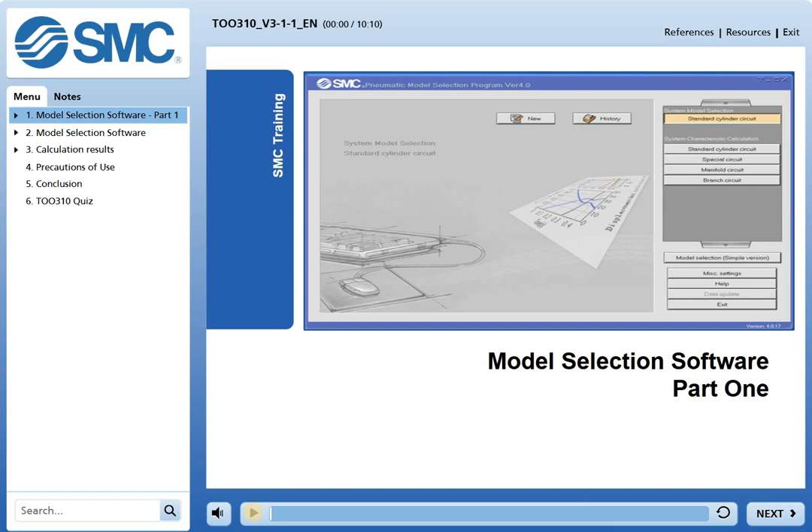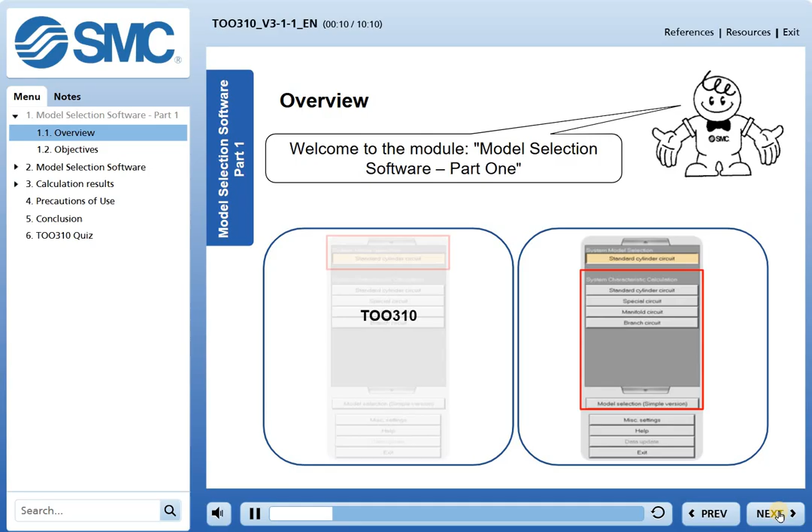Model Selection Software, Part 1. Welcome to the module Model Selection Software, Part 1. There are two parts to the Model Selection Software series, modules TOO310 and TOO311. This module will focus on the system model selection function.

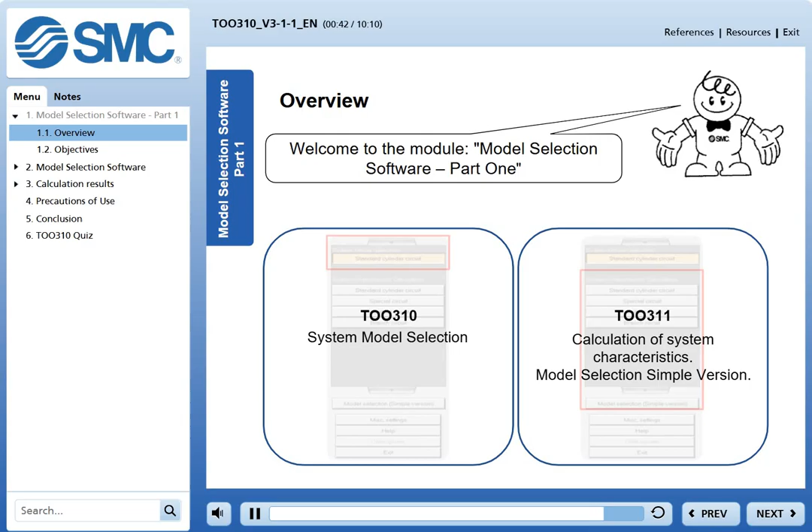You would use this function when you know an application's operating conditions, and would like recommendations on which SMC equipment is suitable for the job. The second module in the series, TOO311, will cover the calculation of system characteristics function. You would use this function if you already have particular SMC equipment in mind, and wish to know if your choice is suitable for the application. The second module in the series will also cover how to use the simple version of the model selection.

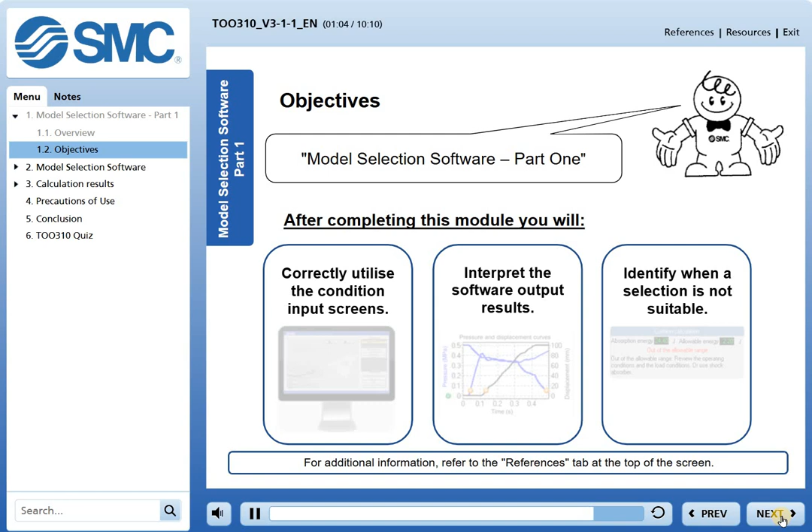After completing this module, you will be able to correctly utilize the condition input screens, interpret the software output results, and identify when a selection is not suitable. Please note, it is assumed that users of this software have a working knowledge of engineering principles, and the software should be used as a guide only.

Where can I download the latest version of the model selection software? By connecting to the site address http://www.smcworld.com/select/en/air. Click on How to install to find out about the installation procedure. Please install the software on your PC to complete the exercises.

This is what you can see on the home page. On the right-hand side, you have the different topics offered by the software. System model selection, system characteristics calculation. A simple version of model selection is offered. The miscellaneous settings button allows you to choose the language, program units and display the version of the software you are working with. The help button takes you to the help manual.

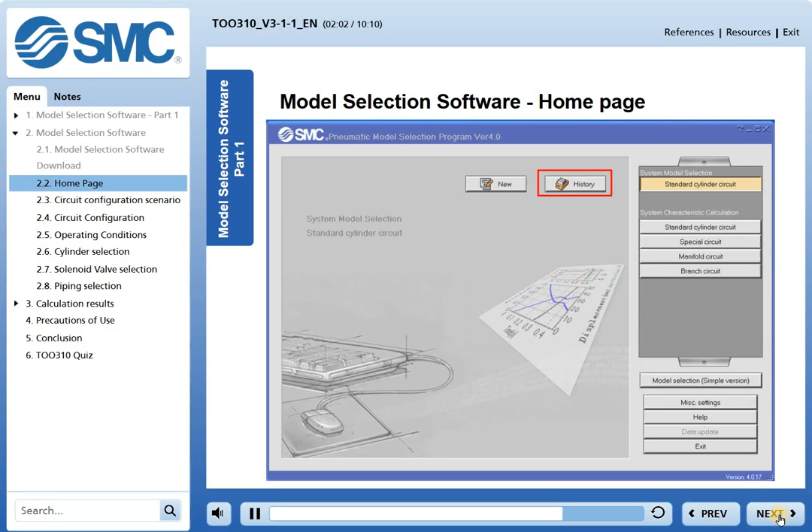The exit button lets you close the software. Pressing the history button displays any saved results from previous calculations. To run a new selection or a new calculation, press the corresponding button from the list and then click New.

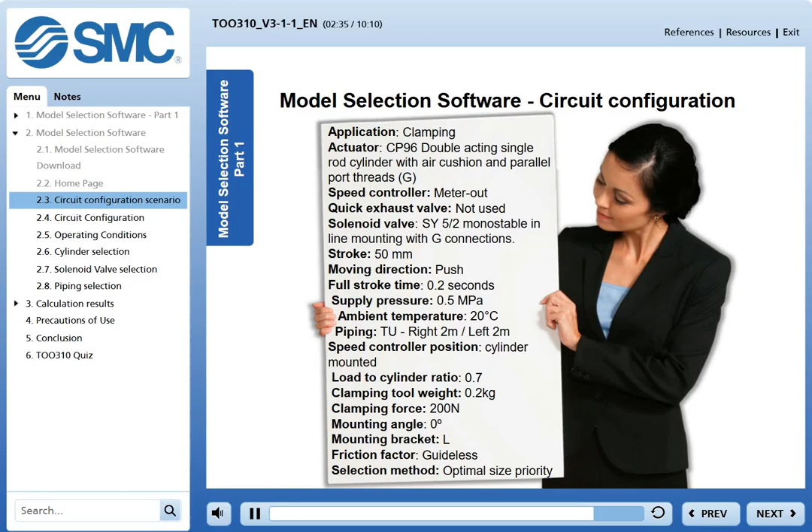In our example, our customer wants to clamp a part so that it can be machined. Using the operating conditions provided, they would like recommendations on which SMC equipment is suitable for the job. If you want, you can download and save a copy of this example from the Resources tab at the top of the page. This will make it easier to practice the example on your own PC before you complete the quiz. Firstly though, let us show you a few videos demonstrating how the software works.

The cylinder circuit. Select the standard cylinder circuit button and click New. On this screen, the operating circuit can be configured by selecting a type of actuator, the solenoid valve, and the control equipment. Once the type of actuator, the control equipment, such as flow controllers and quick exhaust valves, and the solenoid valve have been selected on the right-hand side, the configured circuit automatically appears on the left-hand side.

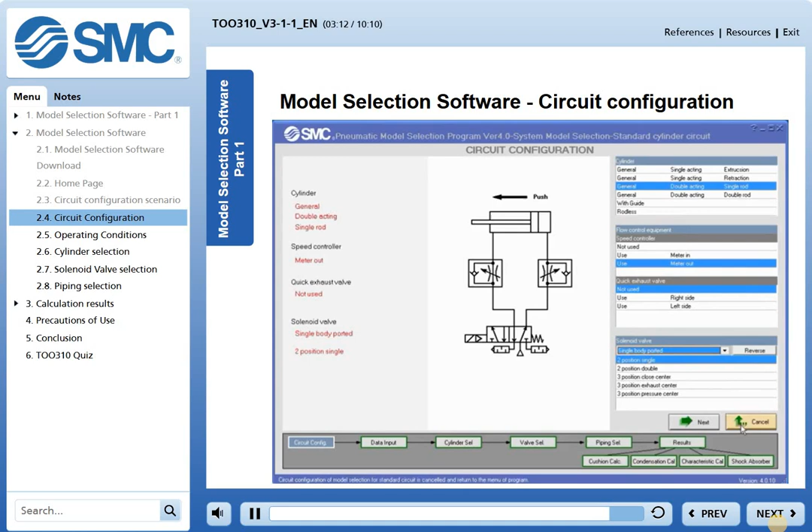In the solenoid valve section, a drop-down menu allows you to choose the valve mounting. The cancel button returns to the main menu. The next button moves on to the condition entering screen. This screen is used to enter the selection criteria. The circuit selected during circuit configuration appears on the left-hand side. We will enter the application parameters, as per our example.

You can see that in most cases, you can use the drop-down lists to enter the application parameters. In many instances, you can also type into the applicable fields. You will need to enter the load to cylinder ratio and give the load weight. In our example, the clamping tool mounted on the piston rod weighs 0.2 kilograms. If the cylinder is used for the transfer, the resistance force is not required.

If it is used for clamping, as in our application, the clamping force must be entered, in our case 200 newtons. The clamping force is the end of stroke force. It therefore influences the choice of the actuator's internal diameter, but not the full length of the stroke. If the cylinder is used for pressing, the resistance force must be entered.

Enter the mounting angle. Notice the orientation of the cylinder changes in the diagram. Our application is horizontal, therefore 0 degrees. Finish by selecting the friction factor. Again, notice the diagram change on the left-hand side of the screen. Now the selection method needs to be chosen. There are two methods to choose from.

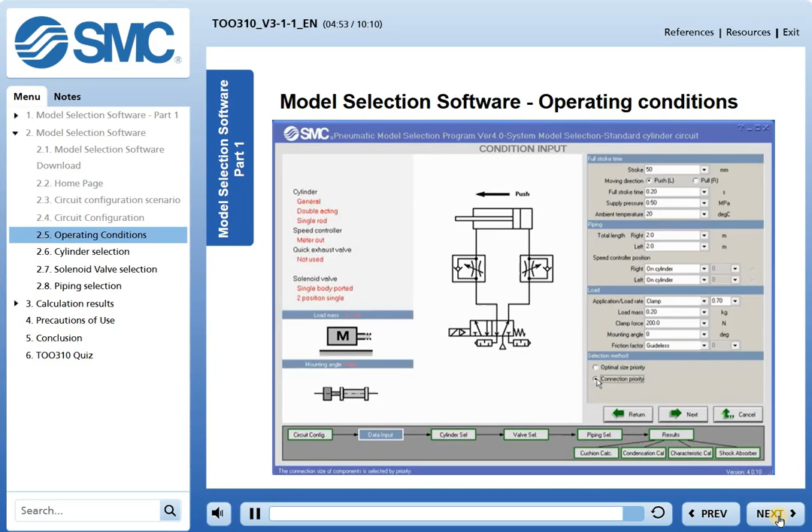Optimum size priority: regardless of possible connections between components, it is the component with the optimum size, the smallest, that corresponds to the required stroke time that is selected as a priority. Or connection priority: a component that corresponds to the required stroke time is selected by giving priority to the possible connections between components. Let's choose optimal size priority and click the Next button to move on to the cylinder selection screen.

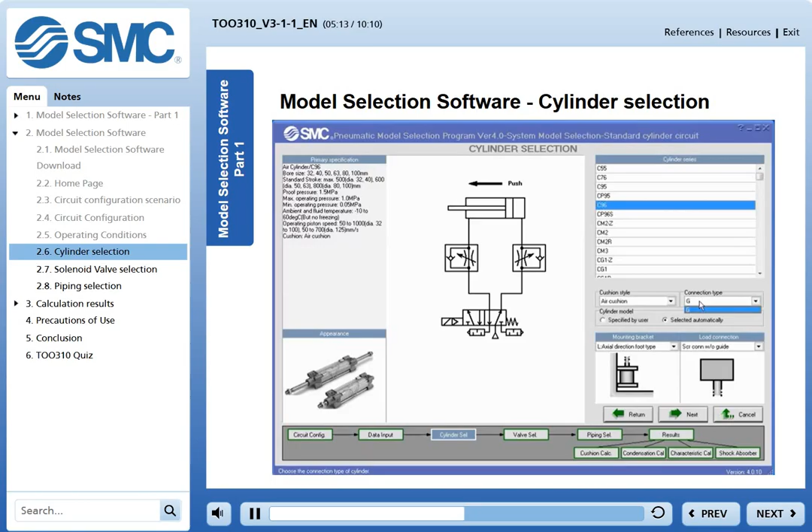On this screen, you have 6 inputs. Select what type of actuator you want to use. In our example, we will choose the C96 with air cushion and G, parallel, port threads. The cushion style and connection types available will depend on the selected actuator. The next question is, do we want the software to select the cylinder diameter, or not? In this case, yes we do. Define how the cylinder is mounted in the machine, and the load connection. Click Next to continue.

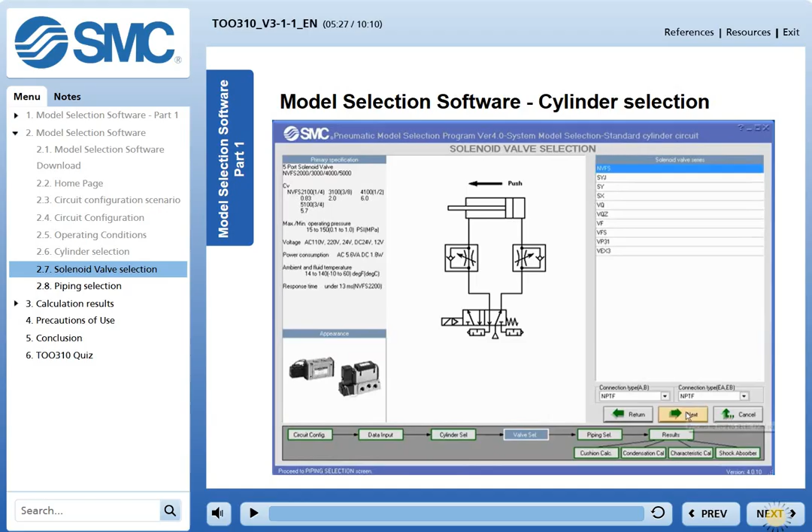On this screen, you have 3 selections to make. We select the valve series, then choose the 2 valve port threads. Click Next. On this page, select the tubing series you want to use. Specifications for each selection can be seen on the left-hand side of the screen. Click Next to go to the results screen.

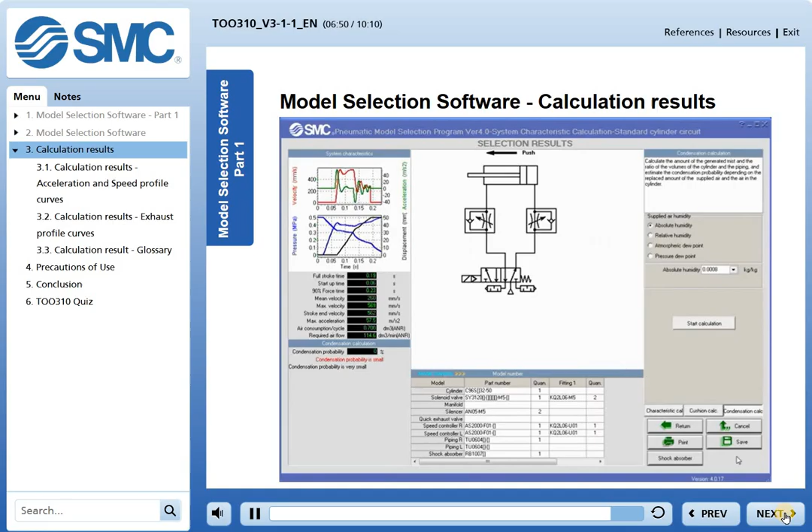Let's have a look at the different buttons. Characteristics calculation is the current page we can see. Cushion calculation: the screen goes on to the cushioning calculation, allowing you to check whether the absorbed energy falls within the permitted range. Condensation calculation: the screen moves on to the condensation calculation screen. The return, print, save and cancel buttons really need no explanation. Shock absorber: this option would only be used if your cushion calculation is outside the allowable limits for the actuator. We will show you an example of this in Module TOO311.

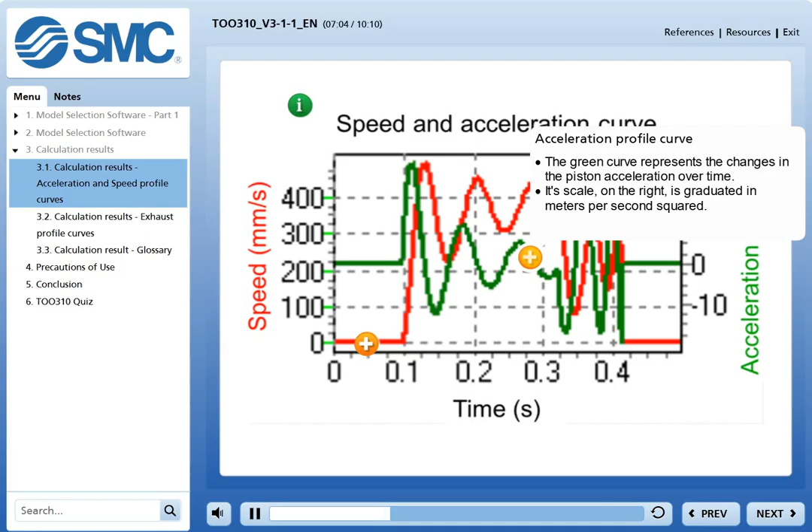Introduction. Click on each button marked with a cross to obtain the curve definition. Speed profile curve: this red curve represents the changes in the piston speed over time. Its scale on the left is graduated in millimeters per second. Acceleration profile curve: this green curve represents the changes in the piston acceleration over time. Its scale on the right is graduated in meters per second squared.

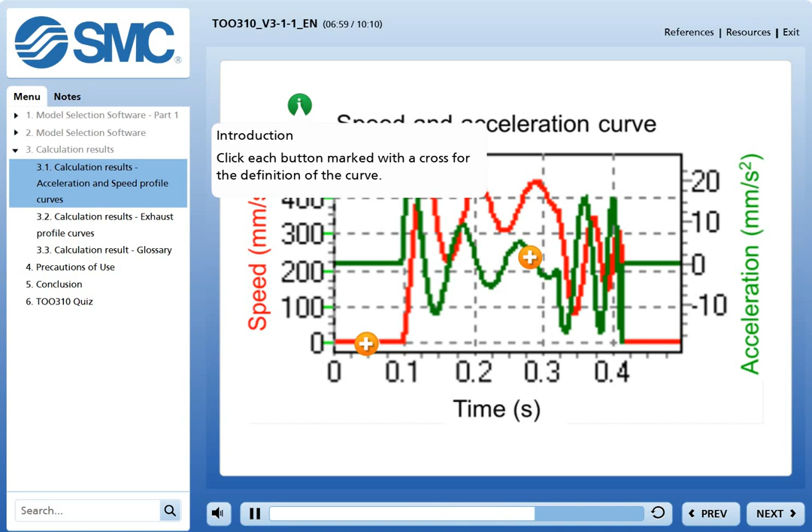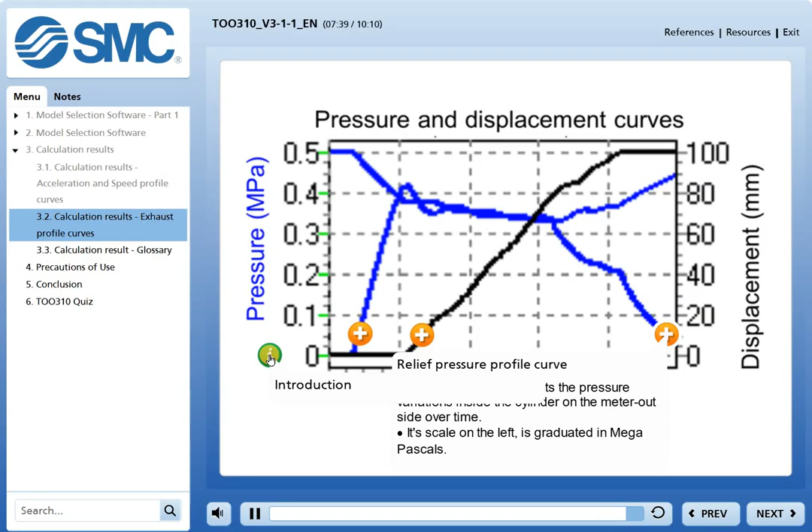Relief pressure profile curve: this blue curve represents the pressure variations inside the cylinder on the meter-out side over time. Its scale on the left is graduated in megapascals. Introduction. Click on each button marked with a cross to obtain the curve. 90% force time: the time required for the cylinder force to reach 90% of the theoretical force after switching on the solenoid valve.

Please adhere to the following precautions for use. This software selects models by theoretical calculation and the result may be a little different from the real products. Only use the result as a reference. Read warnings and cautions in our catalog before using the registered products in this software. The contents of the registered products in this software may be modified without prior warning.

Copying or reproducing part or all of this software is prohibited without prior authorization. The copyright for this software belongs to SMC Corporation. SMC Corporation holds all the rights to this software, including the intellectual property rights. The rights should also be in force for updated or revised versions in the future.

Thank you for taking this module, Model Selection Software Part 1. You are now going to test your knowledge with a quiz.